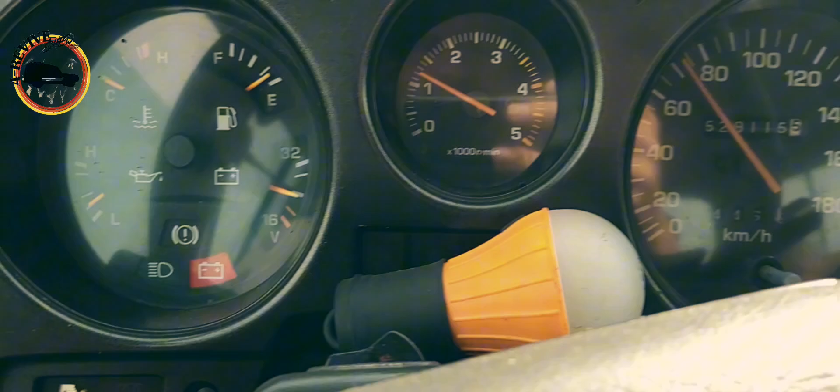What a great day to be alive!

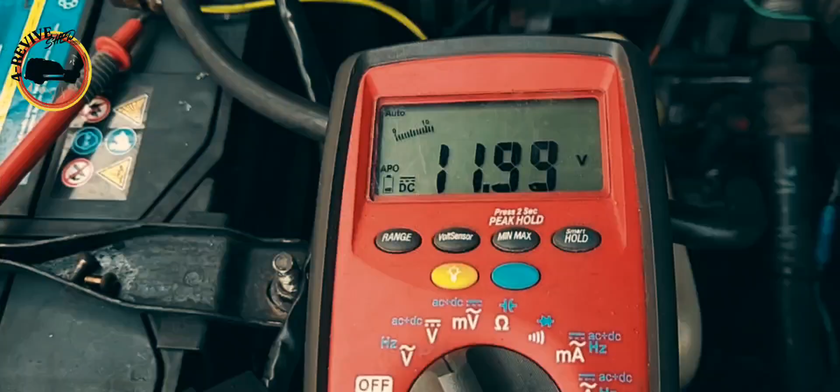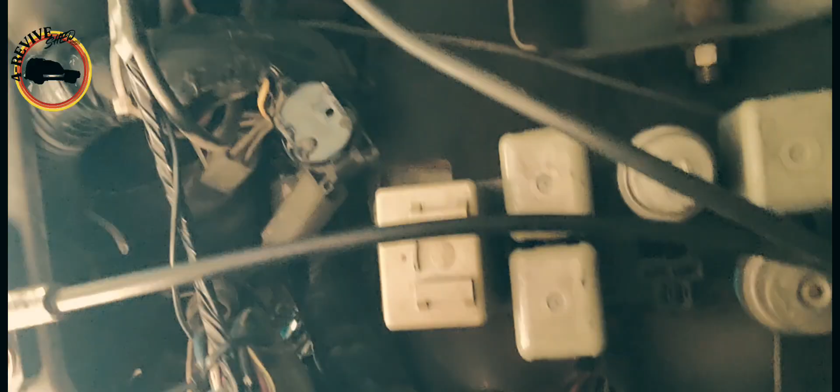So just nothing has happened, even when I am regulating the voltage regulator by myself and put the contacts together with a screwdriver, nothing has happened. So next thing I have to check is the relay. Is the relay for the charging signal and switch contact signal? I don't know, I have to figure it out.

So bleep loop it down, fellas. What else can I do? I already ordered the new voltage regulator, but I just wanted to make sure the bad boy is totally not operating, because when I press all the contacts together, nothing has happened. Seems to be shot. I have to check the little relay for the charging lamp. Some guy told me already.

Bleep loop it down. What's happened with my beautiful J6? So what we can do, take the voltage regulator out, unplug the big 6-pin socket. It's just mounted with 2 bolts on the inner fender side. So if you have it, just grab your multimeter and get good measures on each pin.

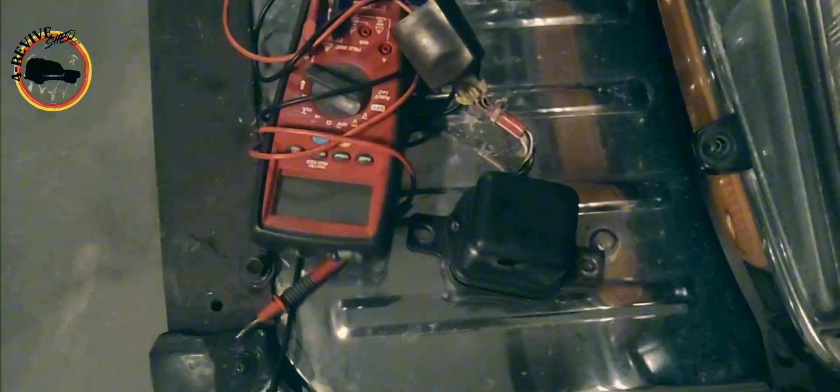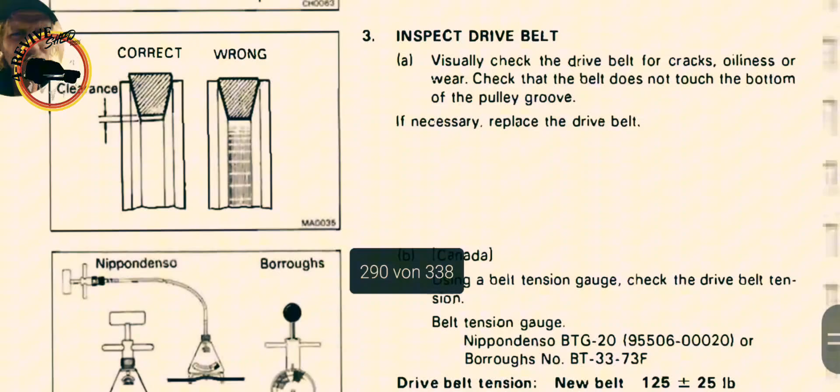So now let's go to the owner's manual, I guess page 290 something-ish. So the full vehicle inspection manual, and now we have to look for the voltage regulator. It's probably page number, oh yeah, 305. So you can see every pin got a name: I, G, N, F, E, L, and B.

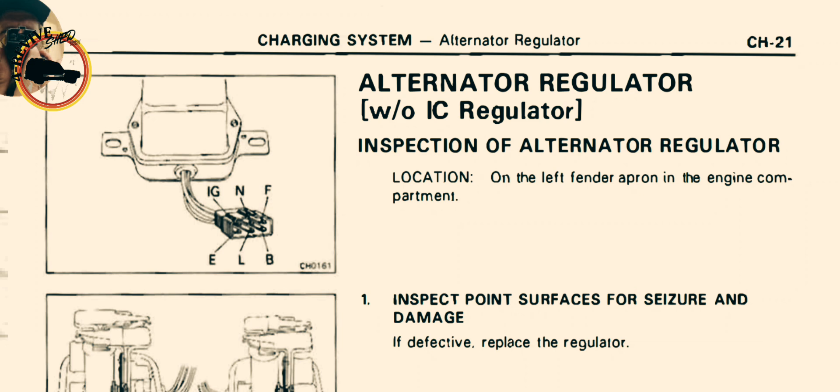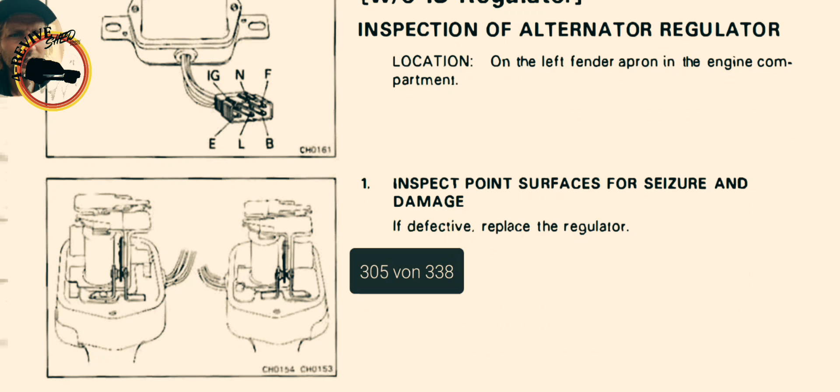And now the owner's manual is telling me we can figure out the resistance to make sure the alternator regulator is working or not. So I don't have an internal regulator, I just have the external regulator. Some are equipped with the internal and external regulator, and the newer solution is to put an internal regulator on your alternator. So let's see. You can inspect I, G, and F, and you need roughly 200 ohms of resistance.

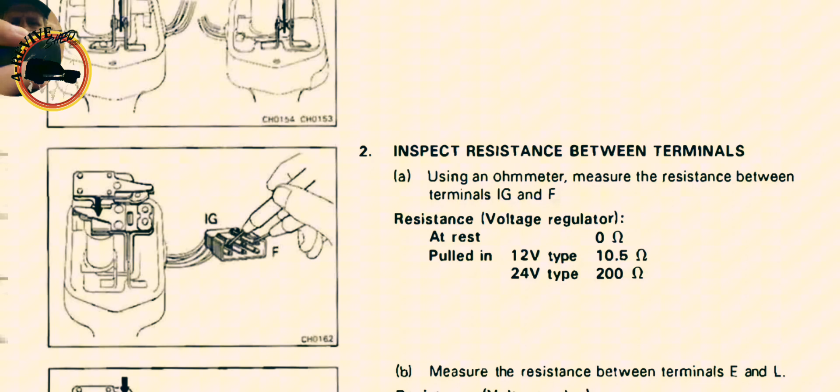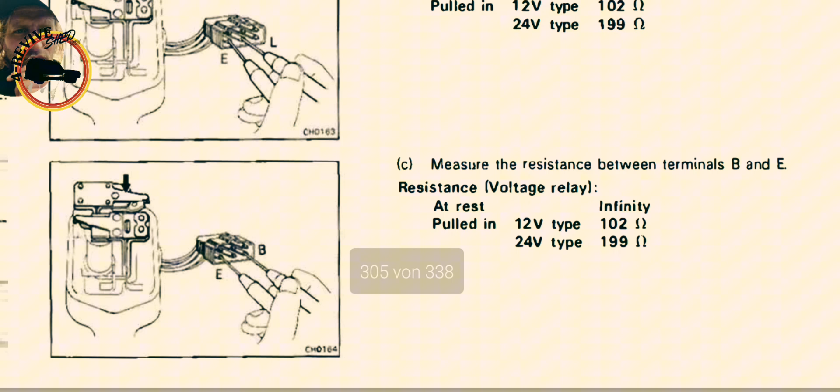At rest means you don't put the contacts together, and pulled in means you put the contacts together. You can see it with the little black arrow on the contacts. So yeah, and afterwards you're going step by step. So E and L resistance, also 200 and 0. Then you can measure E and B. Also 200 and infinity. Infinity means there's no measure on the multimeter.

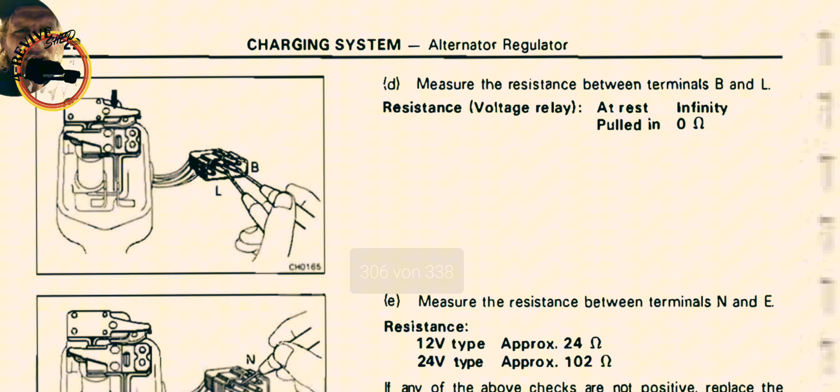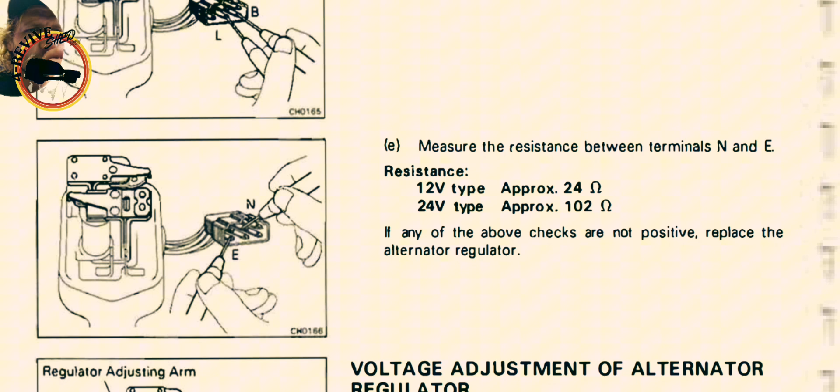And the next one is L and B, also nothing on the multimeter and 0 resistance. And the last one is E and N. You need to have 102 resistance, something like that-ish. So let's check them out. If those measures are failing, your regulator is shot. You can do nothing. That's what the manual is telling me. So let's start the game.

Multimeter. This one has to watch me. First of all, I have to measure I, G and F, which are the upper ones. And as you can see, it's not that easy to watch the multimeter and check the contact. So now everything is at rest. At rest has to be usually 0. And if it's pulled in, which means this one, you have to go to 200.

So as you can see, pulled in 200, close by 198, and at rest 2.4. It has to be 0, but I guess a little number should be fine. Let's go to the next one. E and L, the lower two ones. Must be those ones. Sometimes a little bit hard to have just one hand. So it means at rest 0 and pulled in. Oh, it's not that easy.

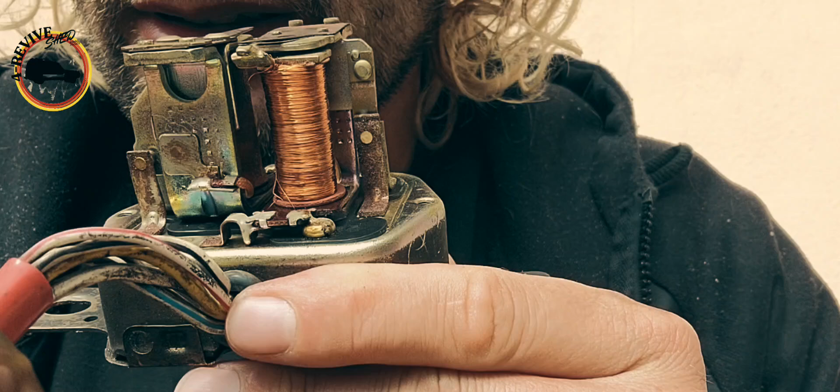So I took the measurement the second time, and I have a problem with the last E and N port, and I don't get the resistance of 102. So guys, that's a pretty good solution to measure your external voltage regulator. I found out that the last contacts between E and N are maybe short, because I have to get a resistance around 102 ohms between the middle upper one and the left lower one. And if I'm pressing my finger right here on the copper wire to the welded mount, I get around 100-ish. So I guess this one is short.

So if you have any charging problems, check with the multimeter all the resistances between each of the 6 pins, and you might figure out what the problem is. Is it the alternator or is it just the voltage regulator? The old interwebs told me mostly the case it's the alternator voltage regulator.